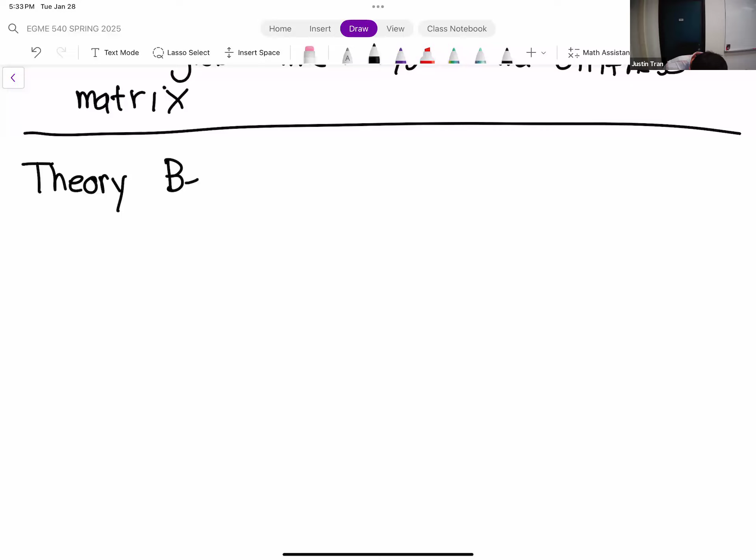So the topic for today, I call it the theory behind FEA. Like I mentioned, this class is pretty much almost entirely application driven, and we'll be learning about ANSYS for the entire semester, but it's still useful, especially if you've never seen finite elements before, to at least understand what's going on at a very broad level, so that you know what the computer is doing.

So like I mentioned, finite element analysis, or FEA for short, actually doesn't have anything to do with computers at all. Nowadays, we often associate it together with computers because of softwares like ANSYS and softwares like Abaqus or SolidWorks simulation. But in the very early days, finite element analysis started as just a subject or topic of research in applied mathematics.

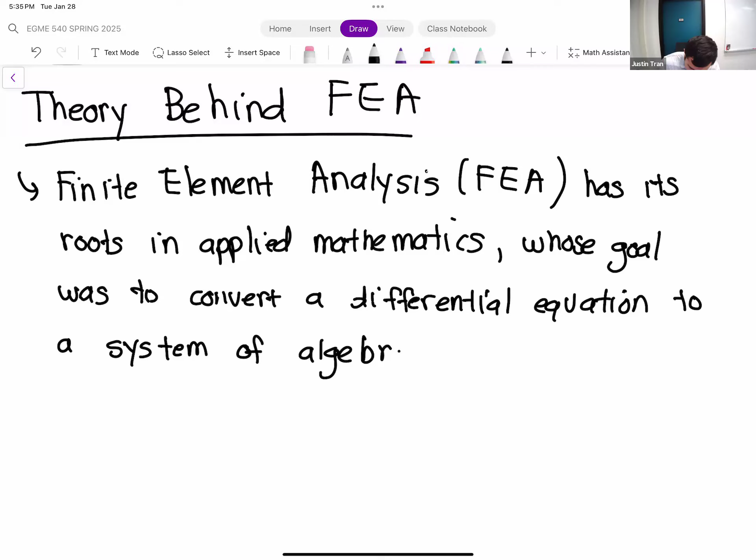And so FEA on by itself actually didn't find the solution to a problem. It just took your problem and transformed it into another problem. So, kind of symbolically, it kind of looks something like this.

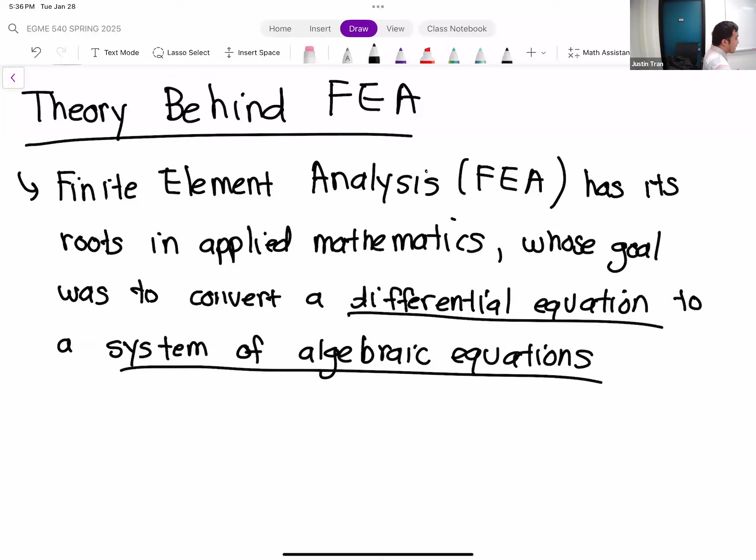So you would take a differential equation, any differential equation. I'm going to use the heat equation as an example here. So let's say we take the heat equation. It doesn't have to be the heat equation, that's just usually the first differential equation that comes to mind.

So here we have a differential equation, in this case, a partial differential equation. If you've already taken 438 or 538, that hopefully should be familiar to you.

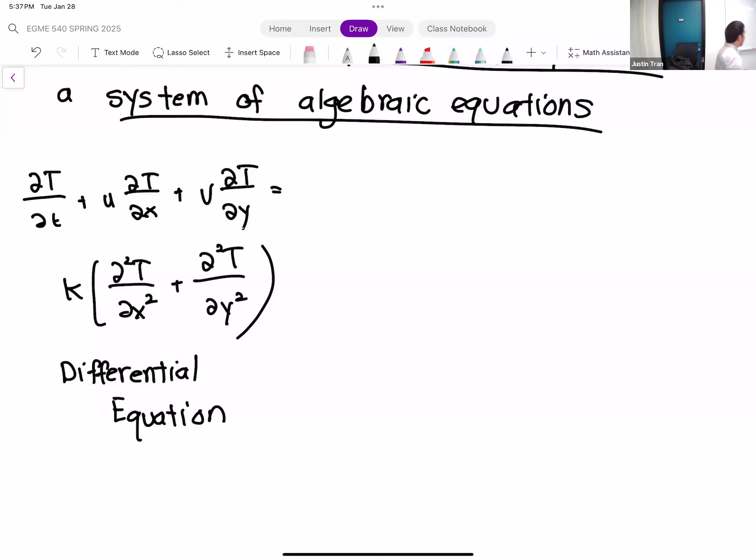And then through finite element analysis, FEA kind of forms this bridge in the middle. So FEA is not the solution itself, it's just a way of transforming the problem.

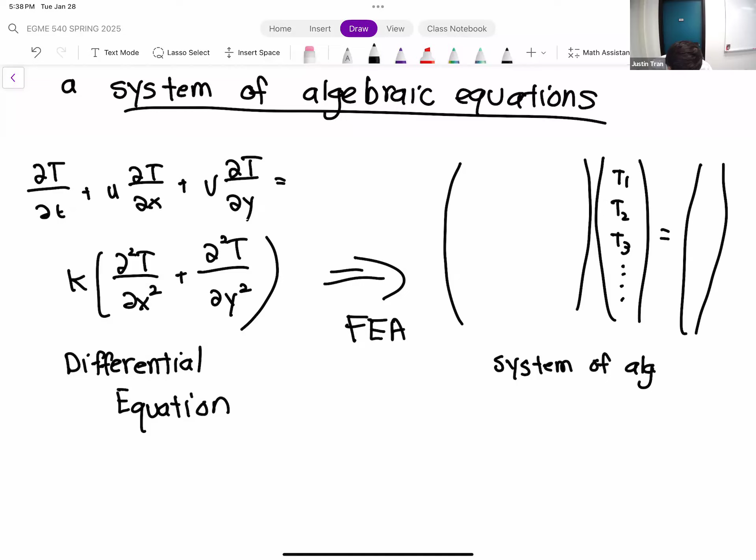And so through FEA, you can take this differential equation and get a corresponding system of algebraic equations. On the right here, you can see I've displayed the algebraic equations in matrix form, right?

Anytime you have a system of algebraic equations that are linear and constant coefficient, you can transform it into a matrix. And that's often convenient if you have, usually if you have more than 5 or 6 equations, it's more convenient to display it in matrix form. And so that's something you're going to see throughout today as well, you're going to see multiple matrices.

And the reason I use matrices here is actually very important for FEA as well, because this is not usually a small system of equations. So this is not 5 equations, 5 unknowns, not even 10 equations, 10 unknowns. We're talking about thousands of equations, thousands of unknowns, or even millions of equations, millions of unknowns. So this matrix here can have anywhere between 10,000 to 1 million equations, just as a starting point.

Right, so these are not trivial systems. And so the idea is that, after you transform the equation with FEA, you get this algebraic system of equations, you solve this algebraic system of equations, and the solution to that algebraic system of equations is equivalent to the original differential equation, or at least it's very close to it.

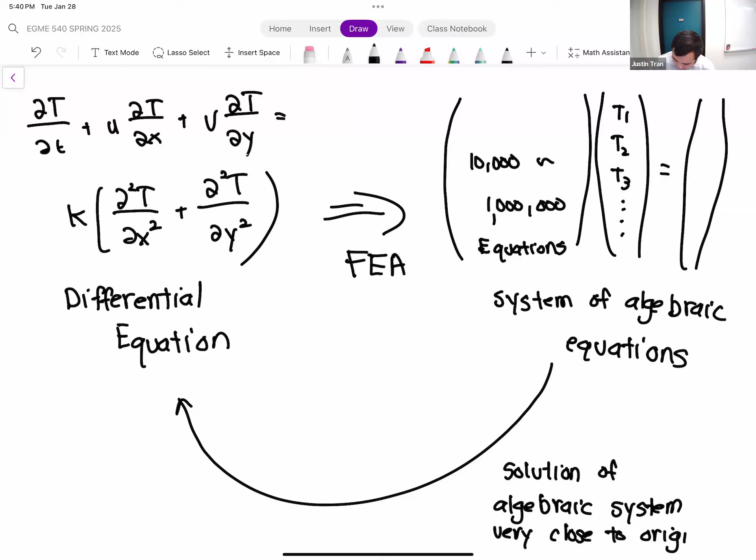Okay, so if you don't want to solve a differential equation, but instead want to solve an algebraic equation, you can use FEA to transform the problem into an algebraic problem, solve the algebra problem, and then you'd have your solution from it.

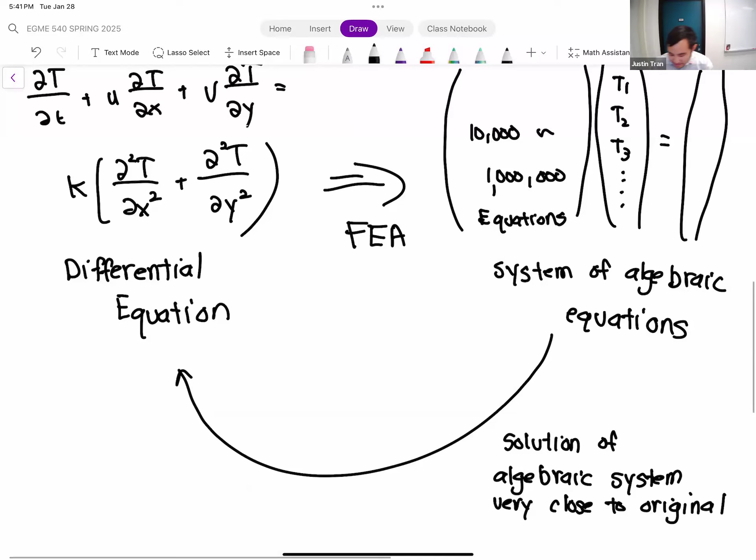So when FEA was first introduced, it was not very well received, because when FEA was first proposed as a theory, this was before the age of computers, before we knew that computers were good at solving these kinds of systems. So people proposed FEA, saying, look, we can take a differential equation and transform it into a system of equations. And the general response was, great, now instead of a really difficult differential equation to solve, we have a really difficult algebra problem to solve. So you've solved nothing, right? And so in its first state, this was not very useful to people.

So this was not useful by itself. It kind of just existed as a novelty, a cool concept, but it didn't really take off as something actually practical.

And it's easy to look at this in hindsight and think those people were fools, how could they not see this was great? Turns out, a lot of ideas in the academic community are just terrible ideas. So this was not an unreasonable reaction by most people at the time.

It wasn't until the 70s, and a lot more in the 80s, that computers and the idea of using computing to solve math problems really started to take off.

Because there's a lot of things computers are good at, but one particular thing computers are actually really good at doing, and it's very relevant today as well, is that computers are really good at solving algebra problems.

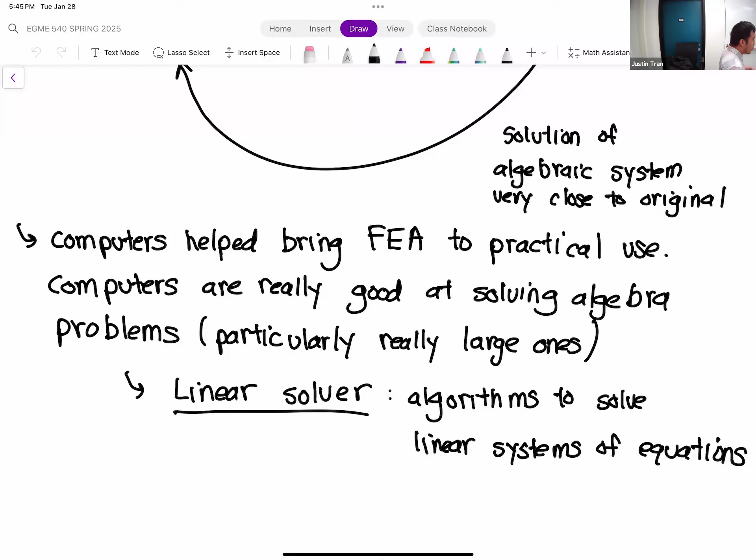But as linear solvers and computers start to show that they can solve these very large systems of equations, people start to say, hey, remember that FEA thing that everyone thought was stupid like 10 years ago? What if we actually start to use that and combine it with computing? And so that's kind of when FEA started to take off.

So computers aren't really that great at solving differential equations by itself, that's not something that can be done at this point. But if you take your differential equation, transform it into an algebraic system, and solve it in a computer, all of a sudden you have a very, very powerful tool.

And it turns out most engineering systems, when you talk about their physical behavior, whether you're talking about a structural system, a thermal system, a fluid system, or an electromagnetic system, the governing laws of conservation of mass, momentum, and energy are pretty much all differential equations.

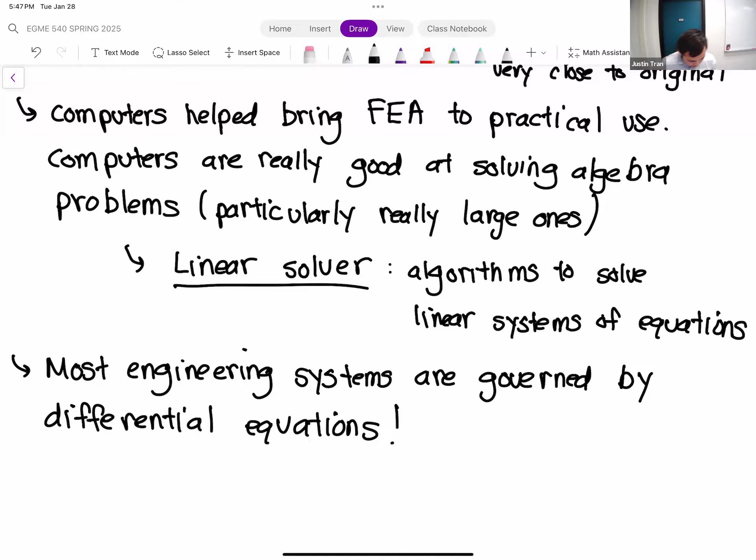So the general flow chart, which is still used today for FEA, goes like the following. Usually when you're doing any kind of analysis or design, you start with some physical engineering system.

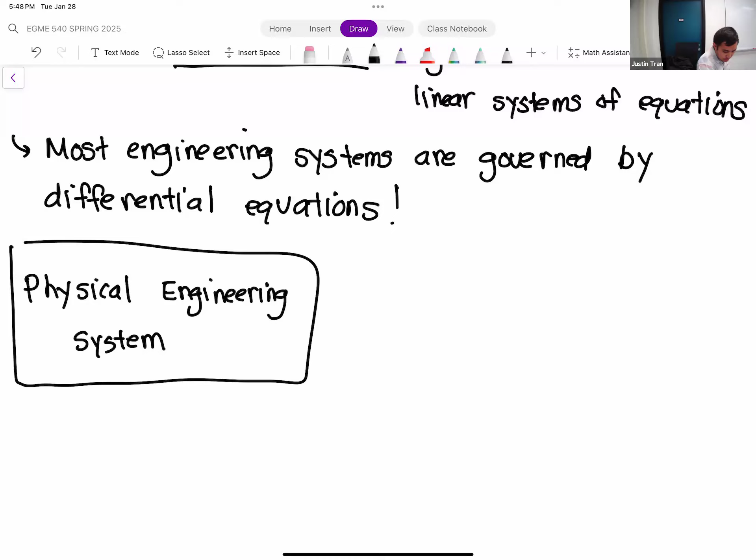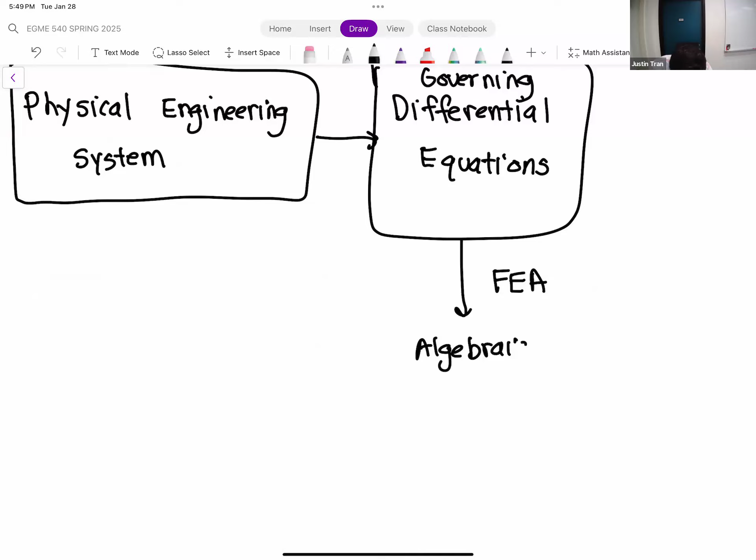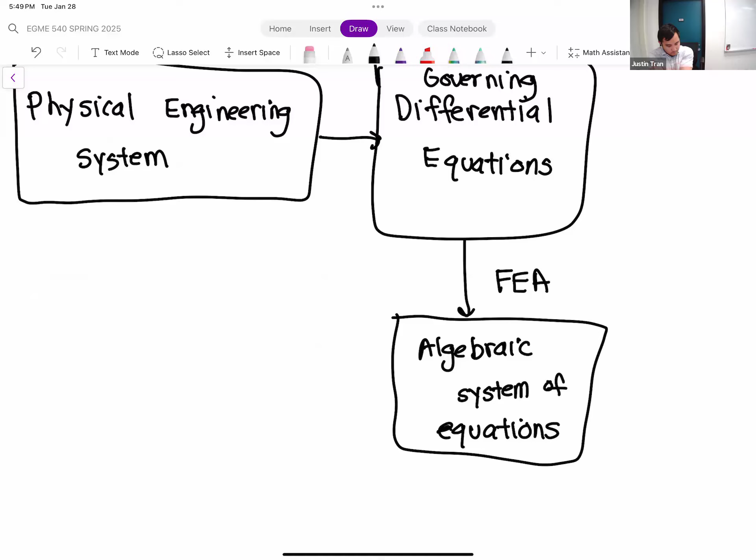And I say physical, but this could also be electromagnetic, thermal, fluids—anything that's governed by differential equations. I just say governing differential equations. What you can do at that point is take those differential equations on your complex system, use FEA to transform it into an algebraic system of equations.

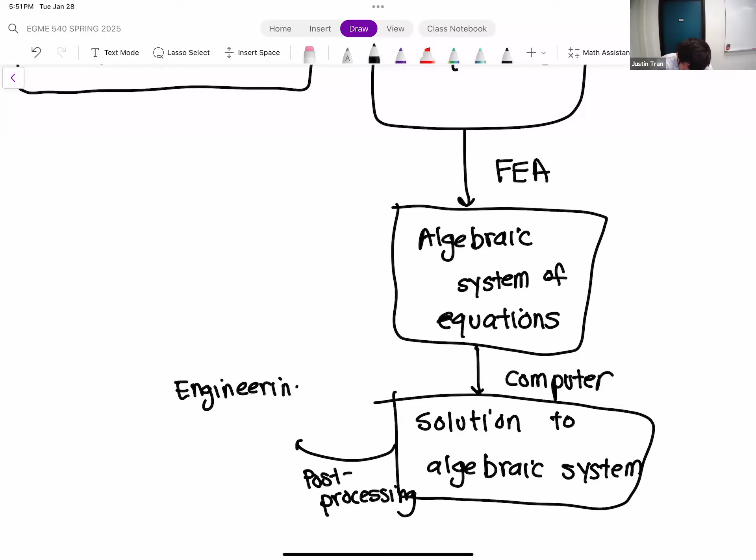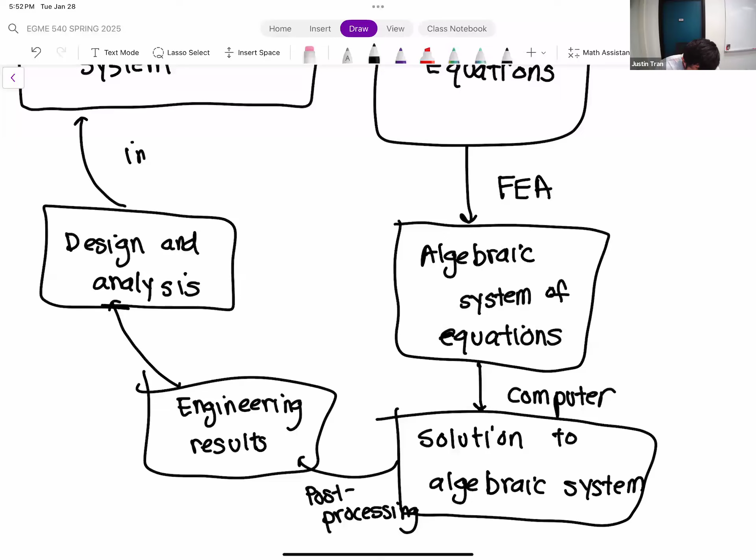And that'll give you the results. Then from those results, you can pass them to an engineer to do any kind of design and analysis. Maybe he wants to tweak the design, or analyze a certain part, compute the stresses. So that's when you start to do the real engineering work. And then based on the design and analysis, you can improve your original engineering system.

So now, with the development of FEA and computing, this new paradigm and new way of doing engineering work that utilizes a computer really started to form. This cycle is, I would say, emblematic of a lot of modern engineering design and analysis that utilizes computers and tools to do this stuff for you. And of course, within this process, you have things like SolidWorks—you'd use SolidWorks to modify your design and get the drawings for it. So it's all within one integrated system that FEA helps facilitate.

Okay. All right, any questions on this?

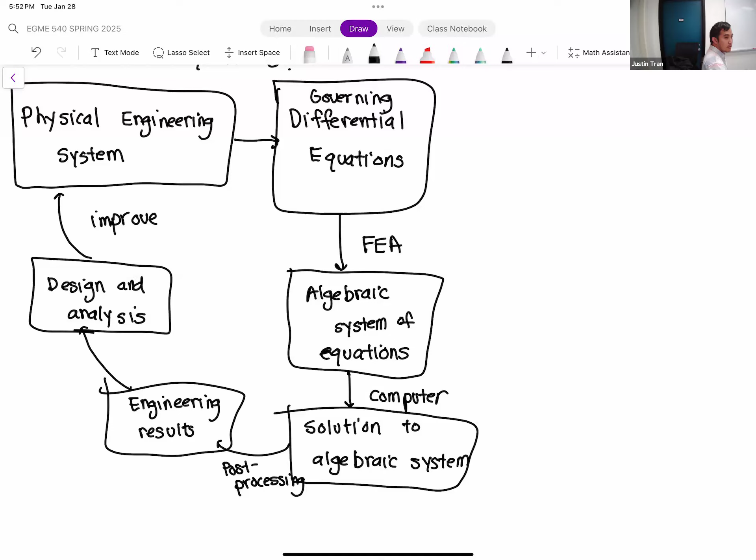Cool. I like telling this story because, even though a lot of times when scientists or researchers come up with a new idea, it seems really stupid at first, a lot of times the technology just may not be there to utilize it effectively. And I think you're seeing that with a lot of machine learning and AI stuff as well. Machine learning has been around for a long time—I remember people talking about it basically all through when I was in school. But it's only now that we have these really powerful NVIDIA chips that it's really becoming part of our everyday life.

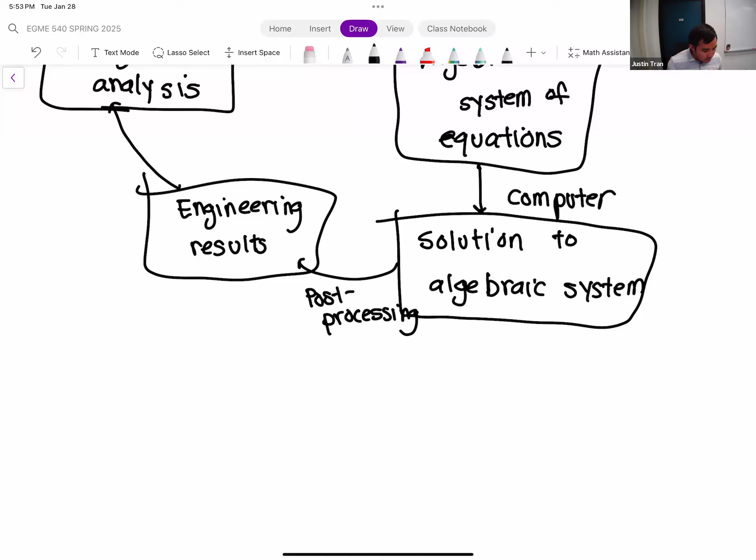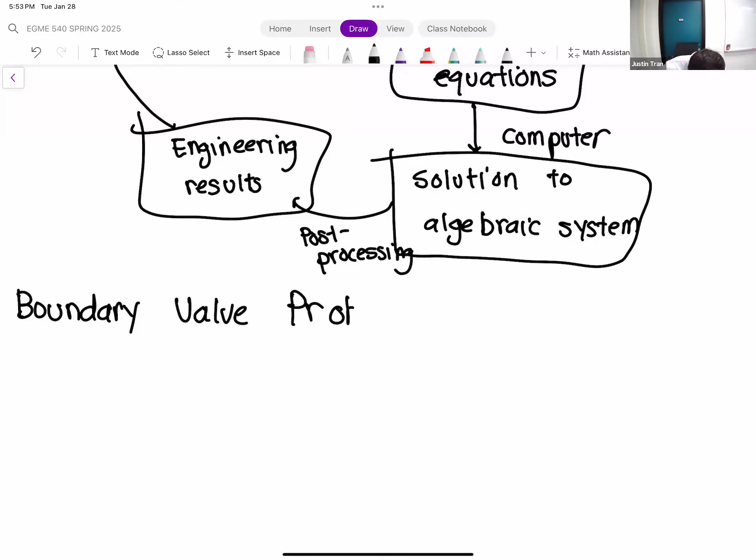Okay, so let's move on. All right, the next thing I want to talk about is the concept of a boundary value problem. A boundary value problem is basically an expression of the underlying mathematical problem that FEA hopes to solve, or strives to solve.

So at the heart of every finite element analysis, even the activity we did last Thursday, is an underlying boundary value problem. I'm bringing this up because whenever you do a new FEA or finite element analysis, it's always useful to think about what's the underlying boundary value problem. It helps organize your thoughts, helps determine the boundary conditions and what equations to solve. And a lot of times, it's actually very useful to write it down as well.

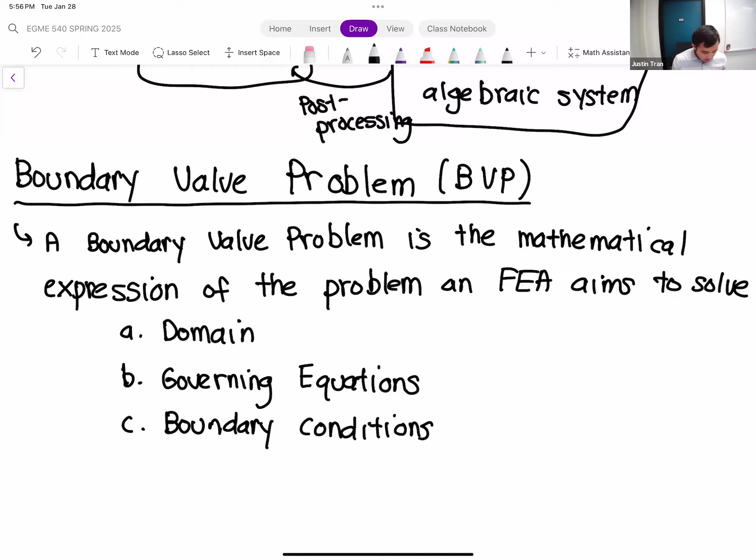Okay, so there are three parts to a boundary value problem. Part one is the domain. Part two is the governing equations. And part three are the boundary conditions. We're going to go through each of these parts. All right, so let's talk about the domain first.

So the domain of a finite element analysis is simply just the geometry on which we want to solve the equation, or the geometry that we want to perform the analysis.

It defines things very simply, like it defines the volume of the analysis, and defines the surface area. It also gives all the surfaces and all of the places where we can apply things like boundary conditions and things like that. Okay. It's the starting point.

So before you start an FEA analysis, you need to have some kind of geometry or some kind of domain, which, again, seems obvious. But it also brings up some very interesting questions of what should be part of your domain to begin with. Okay, so the domain for practical FEAs is often defined by the CAD file that you're using for the analysis.

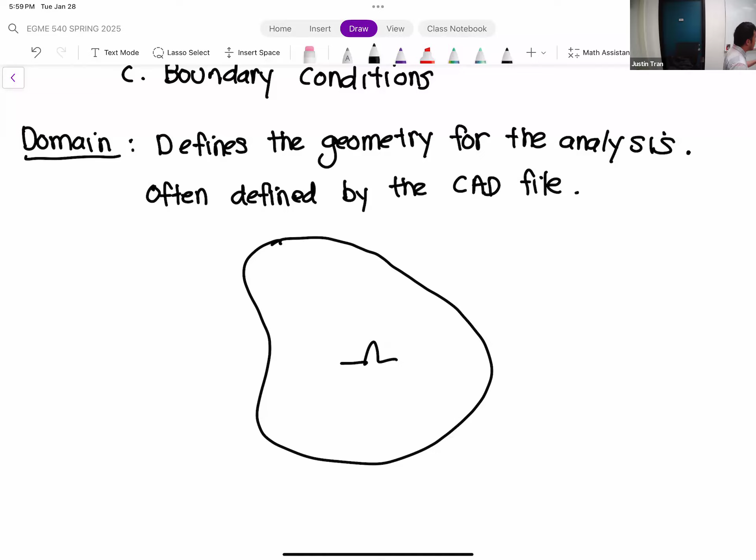Okay. And so I've drawn the potato here for a good reason, because oftentimes we differentiate between two areas of our domain. We have the interior of the domain. The interior domain I often give the symbol omega. And then we have the exterior of the domain as well. The exterior of the domain is often given the symbol partial omega.

So we often differentiate between those two, and oftentimes we make that differentiation just because the exterior is often where we apply boundary conditions. Okay. We'll talk about this in the coming weeks as well, but for the exterior, you often need to use a different meshing scheme.

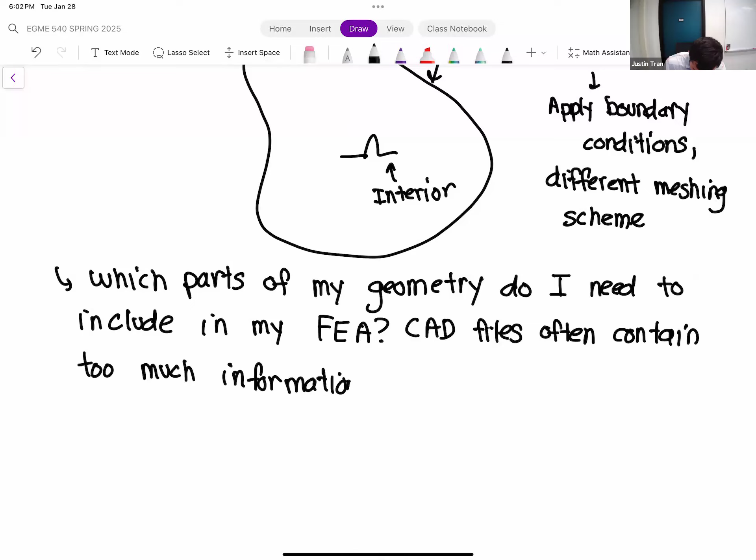So a lot of times, let's say you're an FEA engineer working for a company, and you get a CAD file passed to you from the design engineer. Oftentimes that CAD file is going to have way more information than you need to actually run your analysis. Okay, what do I mean by that? One thing that you're always going to be fighting with in FEA is this idea of how many mesh elements do I need, right? The more mesh elements you have, the more expensive your simulation is going to be.

Usually when you produce a CAD file that's going to be used for design, you're going to include every aspect of that design possible, right? And that includes all the really tiny details or all the superficial stuff, because you're designing something to be made. When you run an FEA, a lot of times you're running stress analysis on parts that are going to be bearing weight or bearing load.

A lot of times, all those really small features on the exterior of your CAD file or your geometry are not really going to be important in the analysis. But they're still going to take up a lot of cost. It takes a lot of energy, a lot of computing power to mesh it and to solve it, right?

And so one thing we're going to talk about a lot in this class is what are the best ways to take a geometry and strip it to the most important parts and then run your analysis on that. A lot of times, just by doing that simple step, you're going to save yourself a lot of cost, a lot of time, a lot of energy, rather than trying to simulate every little thing. Okay.

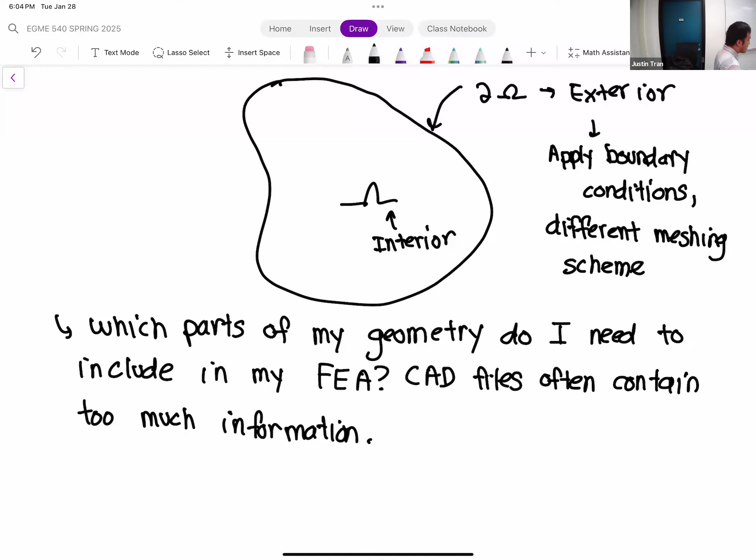Okay, second part to a boundary value problem is the governing equations. Okay. So the governing equations, in a nutshell, these are the differential equations that govern the physical behavior of your system. So every physical system has its own governing equations, okay? Whether it be a structural system, thermal system, fluid system, electromagnetic system, there's some differential equations that govern the system, okay?

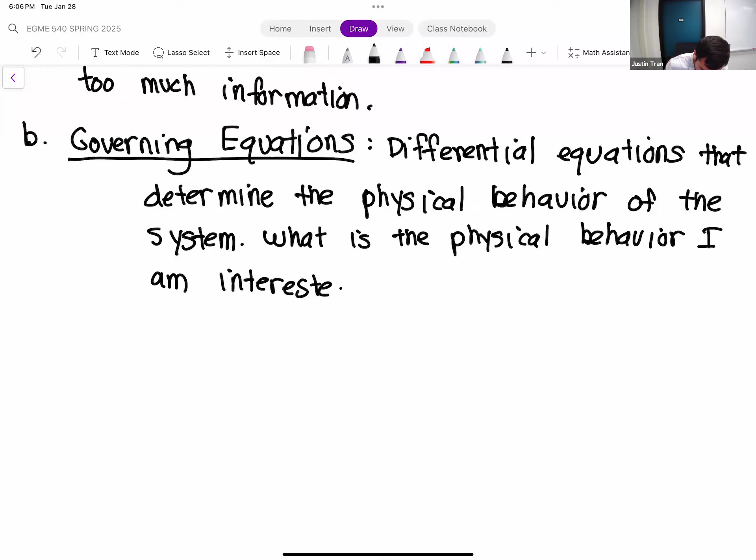So it's always useful to think about, what is the most important physical behavior that I'm interested in solving for in this problem, which, again, seems like kind of an obvious question. And in a lot of cases, it is fairly obvious what you're going to be interested in, okay? But a lot of really interesting engineering problems often involve multiple equations, okay? And those equations aren't really added in by default. You have to manually add those equations yourself.

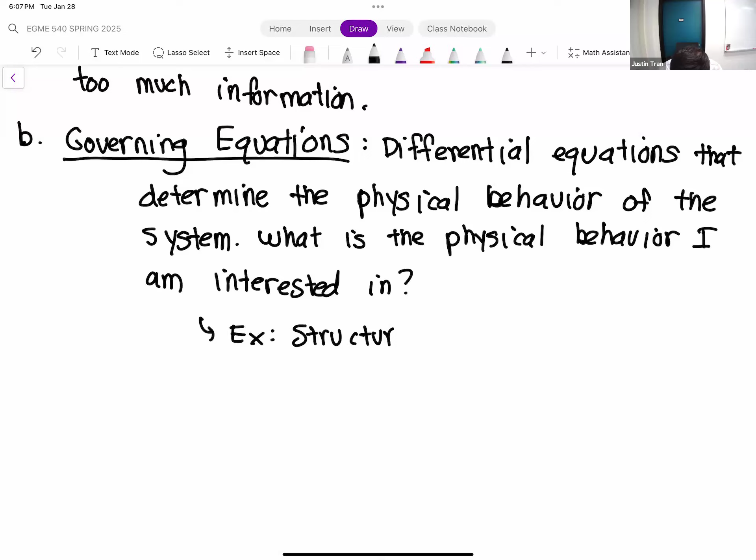So for example, I'll give you one of my favorite examples to give in this case. Oftentimes, a structural simulation will be paired with a thermal simulation. Okay. So if you have a situation where you have a part that's being exposed to some kind of physical loads, forces, pressures, but there may be some heating element involved as well. So maybe the part's being heated as it's going through its thing, or maybe it's being cooled, right? And so one thing that's well known, especially for metals, is that if you heat up a metal or cool down a metal, the temperature of the metal itself will determine its stiffness, its strength, its material properties, right?

That's kind of how blacksmithing works in general, right? In order to make a metal malleable and easy to shape, you can heat it up to extreme temperatures, then you can shape it much easier than a cold piece, right? And so if you have an application where heat transfer is going to be a big thing, but also structures, you need to couple these two types of analysis. And it's not automatic either.

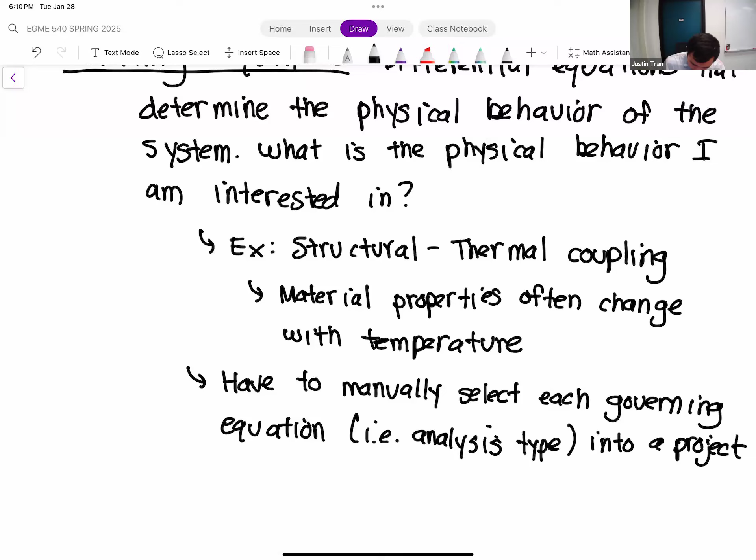Yeah, I think in ANSYS they're called analysis types or analysis systems. Actually, let me list a few here just for completeness' sake. Okay. So the one we'll probably use most commonly in this class is what's called static structural. So static structural is a structural type of analysis that's static, and that essentially means that it's not changing with time. Okay.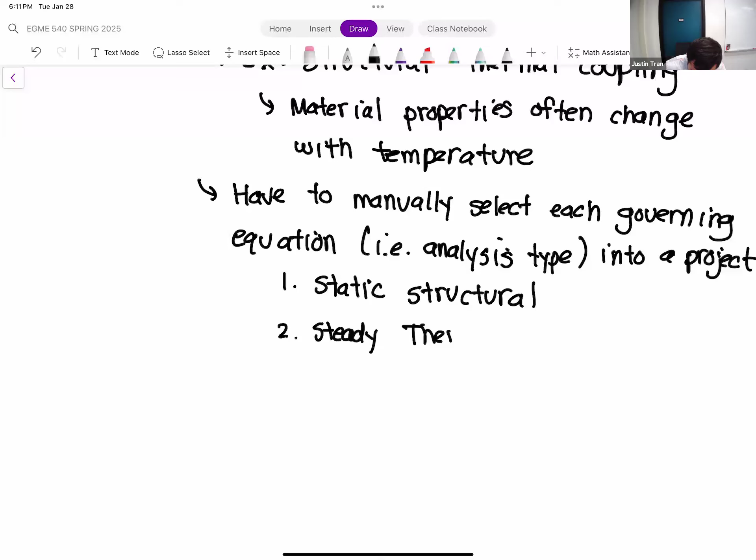Another common one that's used is what's called steady thermal or steady state thermal. So again, this is a thermal situation which is not changing with time, hence the name, okay? But the thermal means that you're going to be solving the heat equation, okay?

Another one that you can do in ANSYS is fluid flow. Fluid flow is actually interesting because it uses a different software called Fluent in ANSYS as well. I do have a handout on it, although I'm not super familiar with Fluent. I often use another tool for CFD, but it is possible to do fluid flow within ANSYS. Okay.

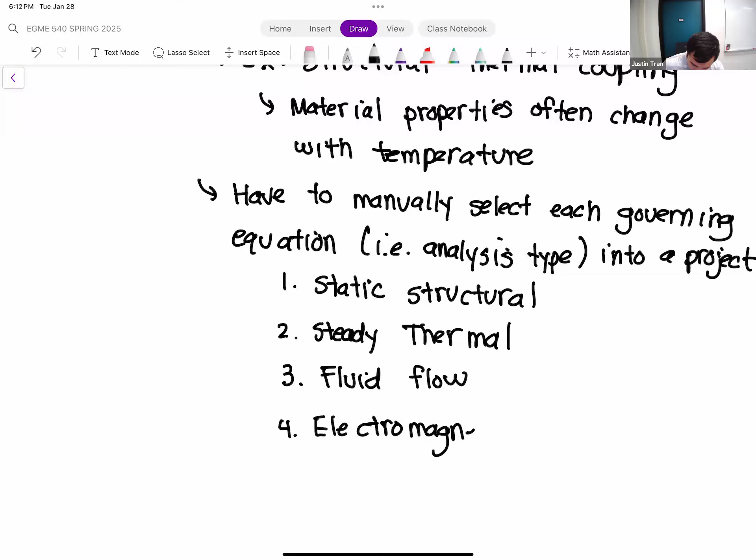And like I mentioned, there is electromagnetism. That is possible within ANSYS as well. I will say that I've never tried it in ANSYS before, just because I'm not an electrical engineer. But the capability does exist to do that type of analysis. Okay.

And also ANSYS has the ability to do time varying analysis as well. So not just steady, not just static analysis, but things that actually change with time. And so there's transient structural, there's transient thermal, there's transient, well, fluid flow is always transient, but you can do transient electromagnetism as well.

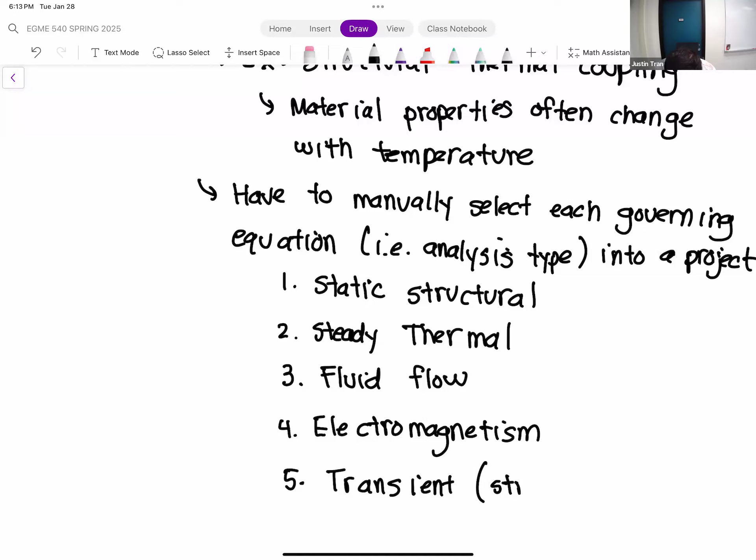Okay. So technically, there's a separate transient one for each of these. So number 5 should be transient structural, number 6 should be transient thermal, number 7 transient fluid, and then transient electromagnetic. So there's transient versions for all of them.

So next time you open up ANSYS, if you're not done with the first activity, you could see on the left there's probably about, I would say, maybe 30 different analysis systems there. So there's a lot within ANSYS itself. And so choosing the right analysis system, choosing the right governing equations, especially when you have multiple types of physics going on, is something that's really important. Okay.

All right. Any questions on governing equations? Yes. You mentioned that you don't use Fluent. Is the program you use better suited for your application? Solver different? Right. So my research personally is on blood flow. So I use basically an open source software called SimVascular to do this. People have used Fluent for blood flow, but I'm just more familiar with SimVascular, so I've used it.

Okay. All right, so let's get to the last aspect of a boundary value problem, which is what actually gives the boundary value problem its name, which are the boundary conditions. So boundary conditions, like I alluded to back when we were talking about the domain, are only really applied on the extremity or the exterior of the domain. In particular, boundary conditions basically describe how the exterior parts of our domain are going to behave from a solution point of view.

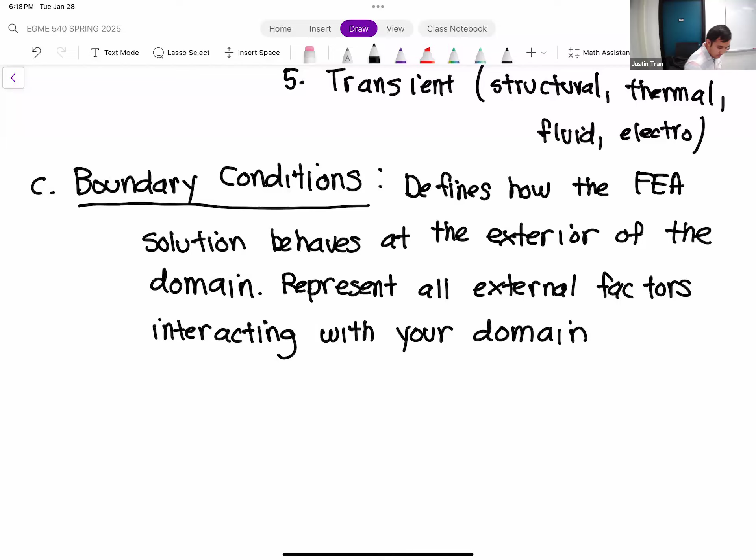And so boundary conditions, alongside meshing, are something we're going to be talking about a lot in this class, just because boundary conditions are probably one of the most important things that determine the accuracy of your simulation. Okay.

And for me, I generally separate the boundary conditions into two main types. The first type of boundary condition that I like to describe is what's called constraint type boundary conditions. And the other type of boundary condition are load type boundary conditions. Okay. And both of those have different conceptual and different mathematical ways that they're applied as well. Okay.

So one thing that I want to highlight here is the interaction between the boundary conditions and the governing equation, at least from a conceptual point. Okay. And so conceptually, you can think of the boundary conditions as the inputs to our boundary value problem. And I'll explain what that means in a second.

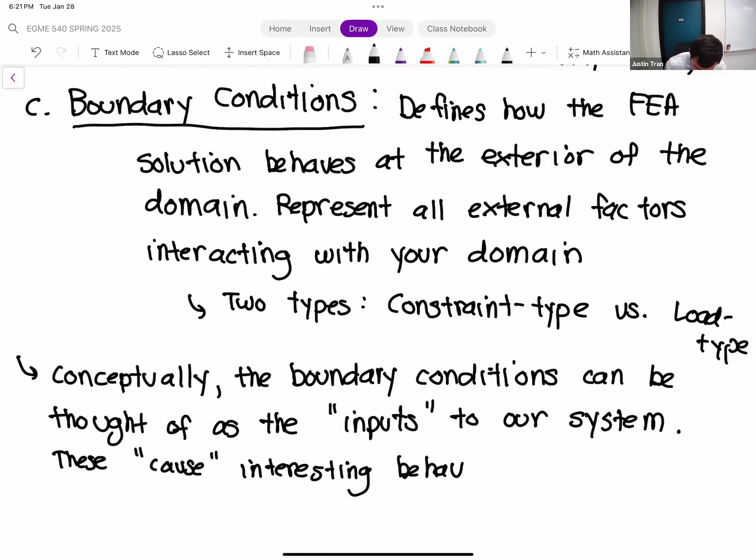Because without boundary conditions, every physical system is actually very boring. It actually doesn't do anything. Okay. Let me give you an example. So that book right there sitting on that table right now has no boundary conditions being applied to it, other than the fact that it's being held up from gravity. So the only force being applied is gravity, and there's a normal force that opposes it, and so that's why it's just sitting by itself, right? By itself, it's very boring.

Now, if I were to go up to that book and just karate chop it with all my might, probably nothing will happen because I'm very weak. But say a very strong person went up and karate chopped that book, that's going to cause some interesting things to happen, right? That karate chop is some kind of external effect or the boundary conditions, okay?

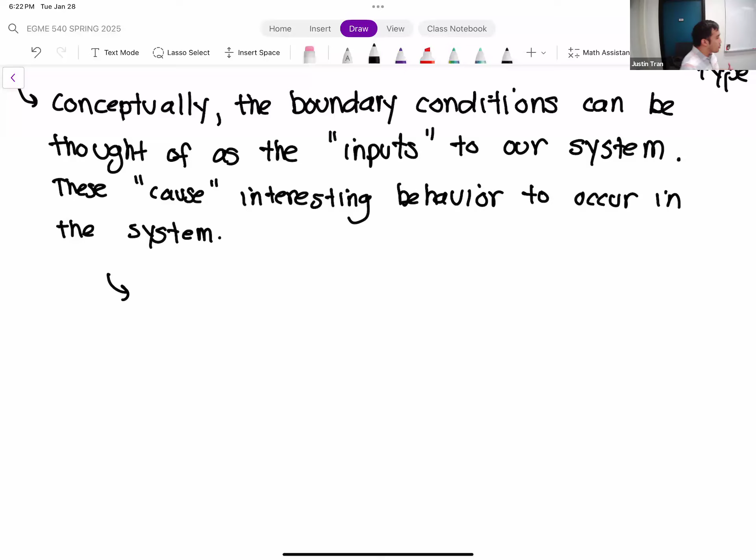So a lot of times, from a finite element mathematical point of view, the boundary conditions are thought of as the input, because without the boundary condition, things are actually quite boring, nothing much really. Okay. So when you apply boundary conditions to a system, the system is oftentimes going to respond in some way. Now, how the system responds is often governed by the governing equations.

Okay. And so you have boundary conditions, think of those as the instigators, the things that are causing some behavior, and the governing equations will determine how your system will respond. Part of the governing equations, of course, are going to be things like the material properties. The material properties modify your governing equations, or they change the magnitude of certain terms.

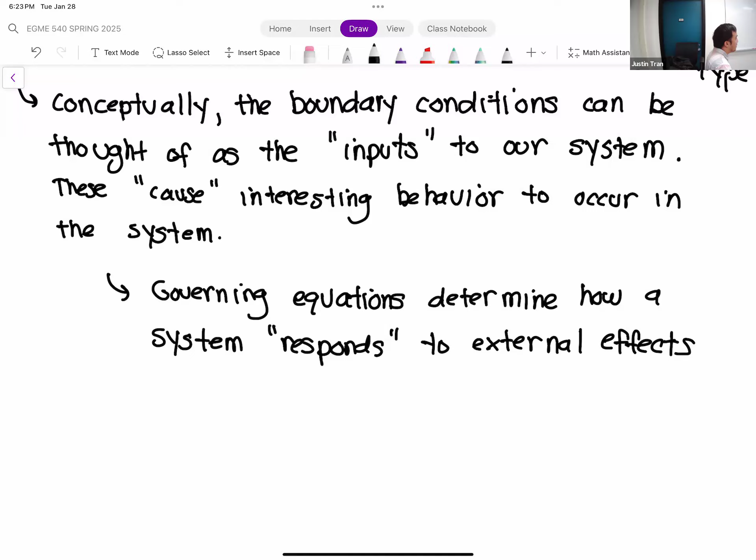But if you think about your FEA, or your boundary value problems, as this cause and effect, or cause and response relationship between the boundary conditions and the governing equations and all that's happening within your domain, it helps to frame a lot of the things that we're doing. Okay. Any questions on boundary conditions?

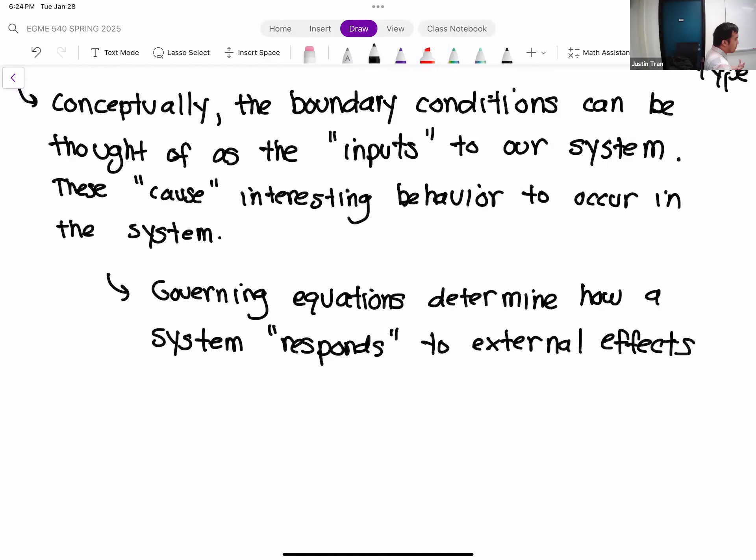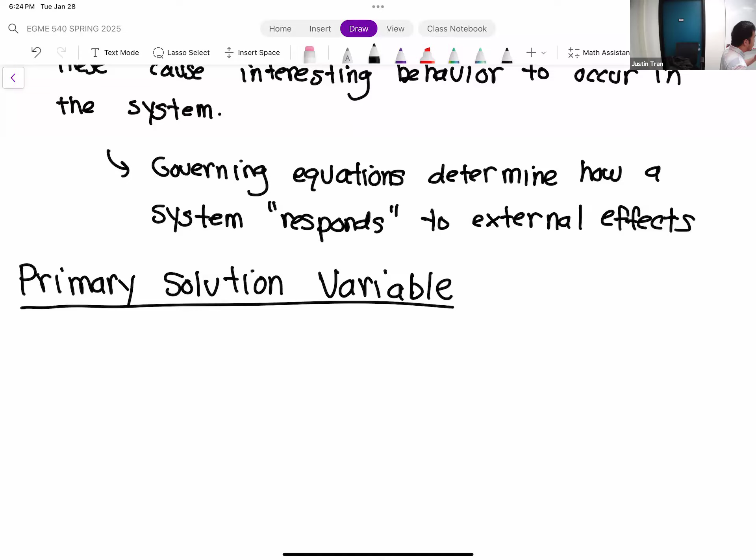Okay. All right. So the next thing I want to talk about is this idea of a primary solution variable. So, like we've talked about today, an FEA is nothing more than a differential equation that we're solving in a computer, right? It transforms into an algebraic equation and so on and so forth. When you solve a differential equation, there's usually one quantity that you solve for first, right?

And so the primary solution variable is whatever quantity or solution is solved for first in a boundary value problem, or the governing differential equations.

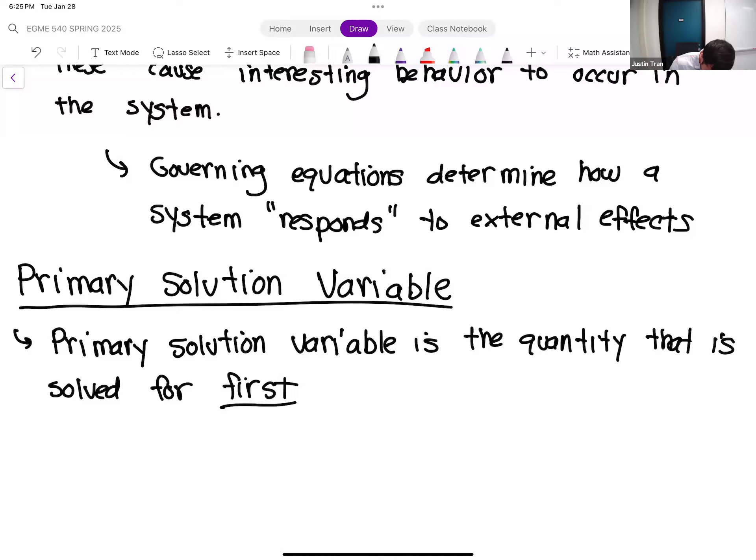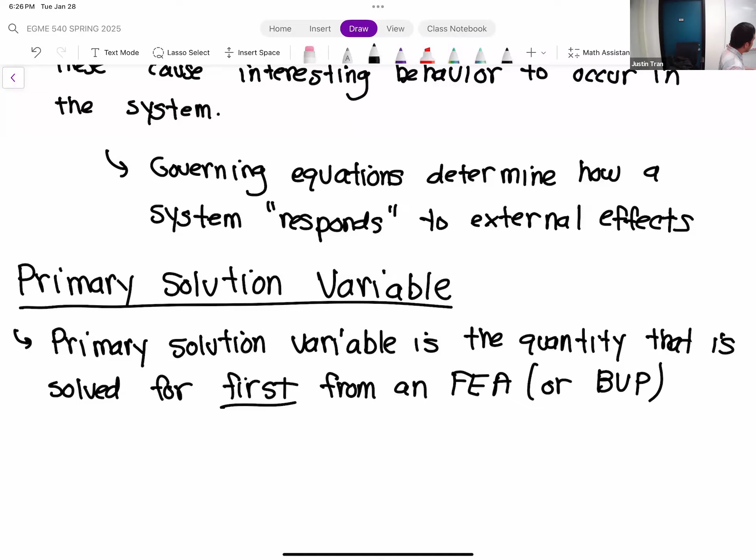Okay. There's always something that's solved for first. And I think this gets lost in the wash a little bit when you're using a tool like ANSYS, and it shows you all the results at once. But under the hood, or mathematically, there's always something that has to be solved for first. And then usually a lot of other quantities are solved for after that. So let me give you an example. In static structural, right?

There are lots of different outputs, or lots of different results that you can show from your FEA simulation, right? You can show things like the total deformation. You can show things like the equivalent stress. And I'll throw one more on there as well. You can also show the equivalent strain.

And even within some of these types of results, there are a lot of subcategories as well. So you can show principal stress, and I know some of you probably did that for activity one. Principal strain, you can show deformation in different directions. You can show stress in different directions, right? You can show factor of safety, things like that.

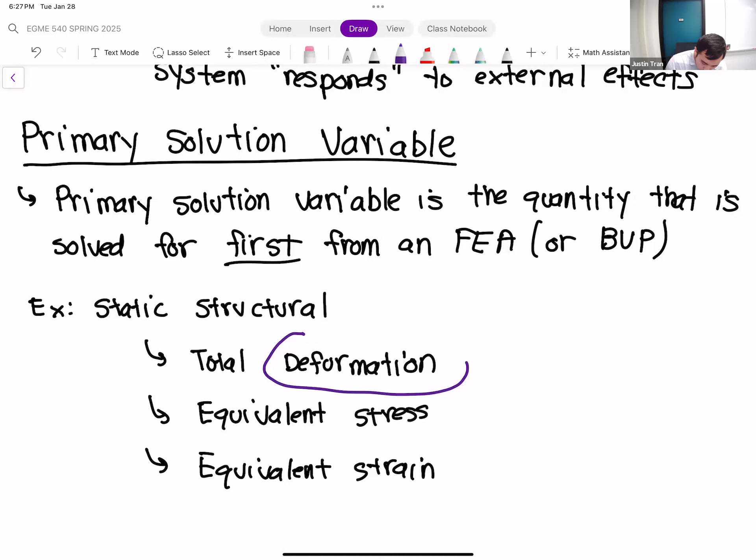So before all of these quantities, there's something that's actually solved for first, which is the primary solution variable. So the primary solution variable in structural simulations is the deformation.

And so whenever you're running a type of governing equation, it's always useful to think about, what is your primary solution variable, right? If you're running a thermal simulation, the primary solution variable there is temperature. If you're running a fluid flow simulation, the primary solution variable is velocity. For electromagnetism, I actually don't even know. I think for electromagnetism, it might be the electric field. I'm guessing everything is derived from there. Okay.

All right, and then all the other results that you see, and sometimes it could be a lot, sometimes it could be a couple dozen, which is the case for structural. Okay, everything else is what's known as a derived quantity. And so a derived quantity is not solved directly from the governing equation. It's not solved directly from the FEA. A derived quantity is computed after you compute the primary solution variable.

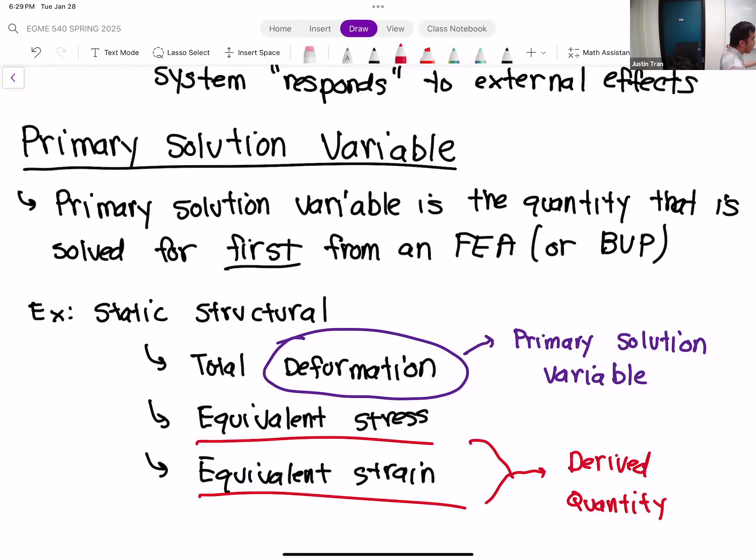And so kind of the order of operations is that first your ANSYS or your FEA is going to solve for the primary solution variable, and then it's going to take that solution and then solve for all of the derived quantities after that. Okay? So other common ones, factor of safety. Factor of safety also is a derived quantity. Okay.

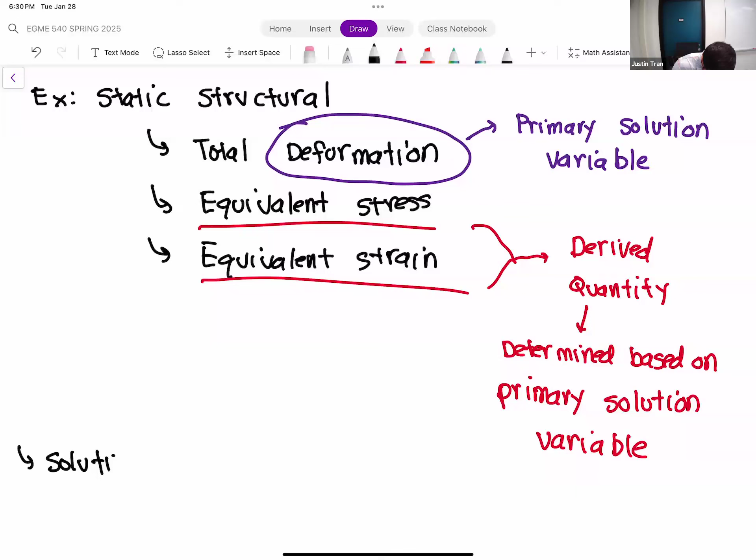So why is this relevant? So generally speaking, your primary solution variable will be computed fairly accurately, or the accuracy of the primary solution variable will be the highest. Okay. So if you're running a static structural simulation, you can probably trust that the total deformation, at least compared to the other types of results, that's going to be the most reliable. Okay, it may still be wrong, but it's probably the least wrong out of everything.

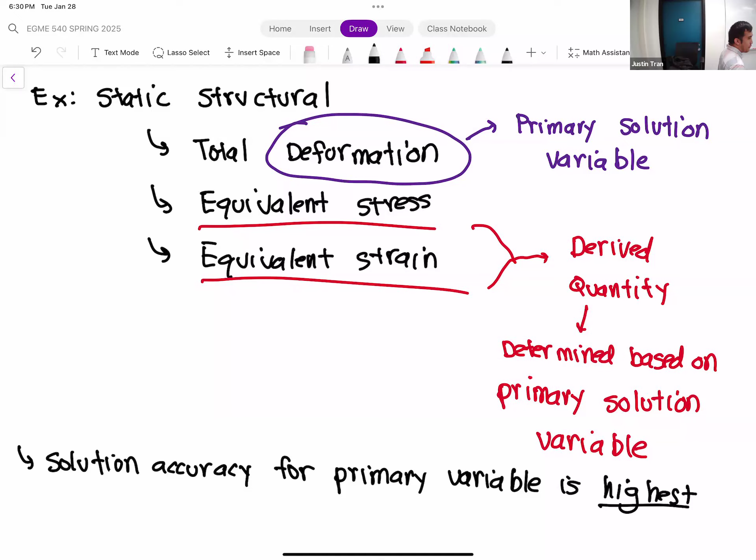And then all your derived quantities, their accuracy or their reliability is going to be low. Okay, so later on in this class, we're going to talk about the concept of a mesh convergence test, which basically tests how accurate or how reliable your solution is relative to the mesh that you have. Okay, and what you should see basically all the time is that your primary solution variable should converge first compared to your derived quantities.

Okay. That's going to be important because you want to ask yourself, what is the primary output, or what's the primary variable that I'm interested in the simulation. And so you don't want to trick yourself and say, I'm interested in the stress, but if I run my convergence test on deformation, I don't want to trick myself into saying that this is more accurate than it is. Okay. So it's always useful to be aware of what your primary solution variable is when you're talking about reliability, accuracy, things. All right. Any questions on this?

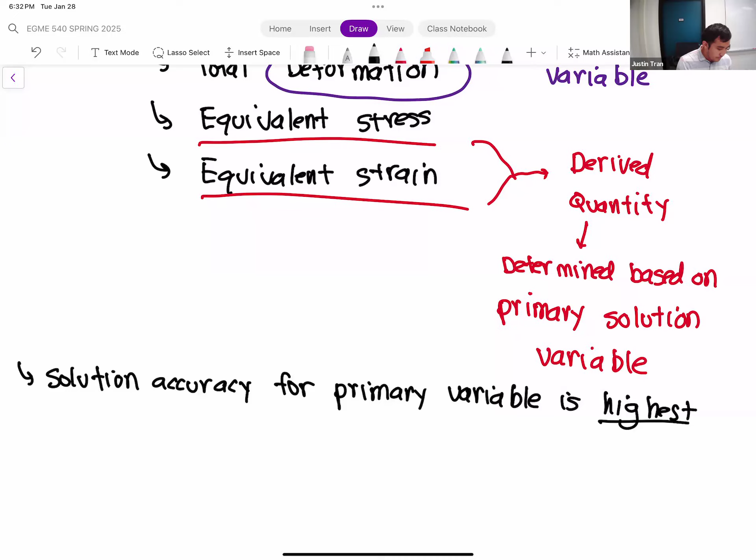Okay, so one last thing before we wrap it up for today is I want to talk about the concept of element stiffness matrices. Now, we're not going to go fully into element stiffness matrices. For those of you who have taken 541 or 410 with me, this is something that we talk about for weeks. It takes a long time to get used to. But I at least want to show you, because I think understanding what the element stiffness matrices are will give you an appreciation of what's the difference between a mesh with 1,000 elements versus a mesh with 1,000,000 elements.

Okay. So the idea with an element stiffness matrix is that whenever you run a finite element simulation, each element in your mesh kind of represents a mathematical system on its own. So every single element in your mesh will have a system of equations that mathematically describes its behavior. It basically takes your governing equations and applies it on that little tiny element. Okay.

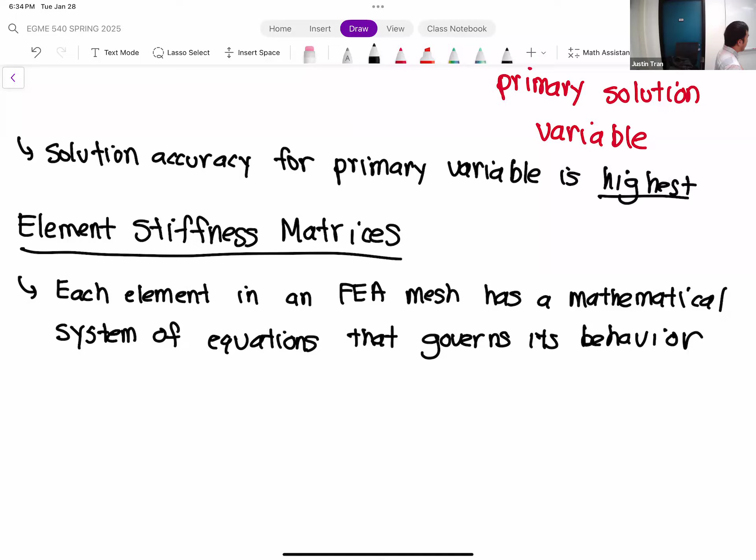So, if you have a mesh, let me go ahead and draw the geometry for our activity 1 again. Okay. And so let's say that you have a mesh that looks like this. Okay.

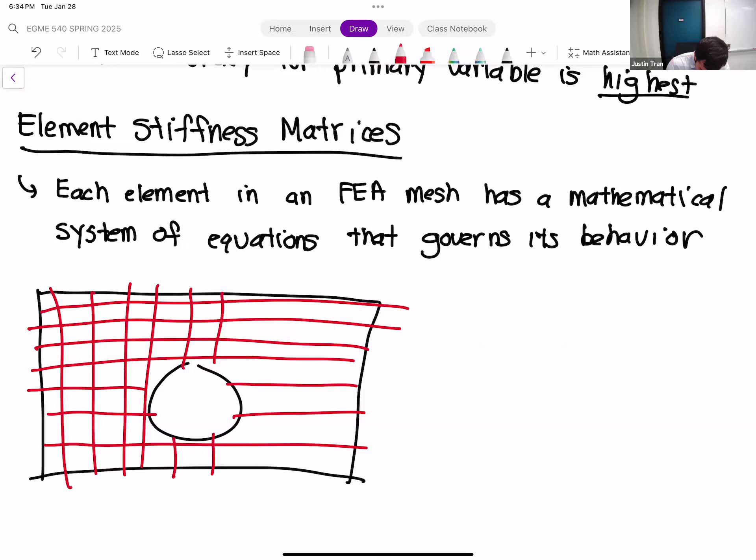Okay, so each element here in this red waffle that I've drawn has a system of equations that governs its behavior. So if I look at this element right here, let me go ahead and bring it out. That small square has its own system of equations that governs its behavior.

Now, if you've taken 541 with me, you may think, oh, that square probably has maybe a 4x4 system of equations that governs its behavior, right? And so that's basically 4 equations and 4 unknowns. So you multiply 4 equations, 4 unknowns by, maybe this mesh has 1,000 elements. So that means there's 4,000 equations and 4,000 unknowns.

Well, the FEA that we did in 541 was kind of a beginner's FEA. So in reality, for something like this in ANSYS, each element probably has somewhere close to maybe 16 to 20 different equations and unknowns associated with it. And then you take that and multiply it by 1,000, 10,000, 50,000 elements that you have, and you can see things start to get out of hand very quickly.

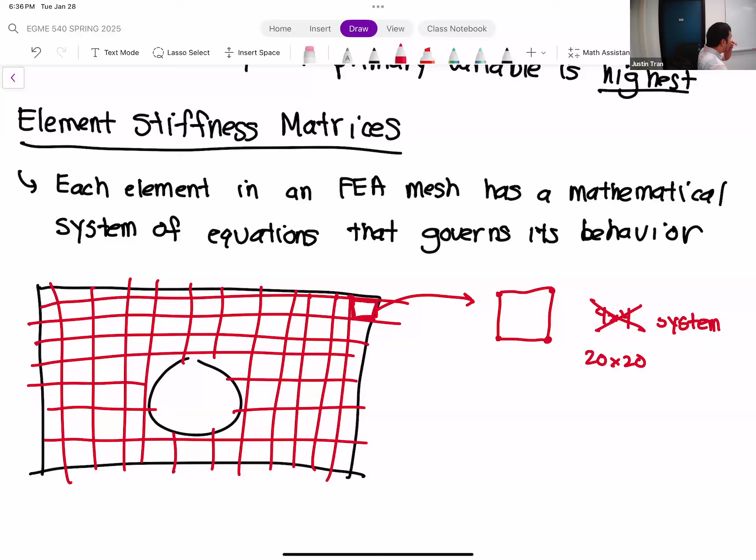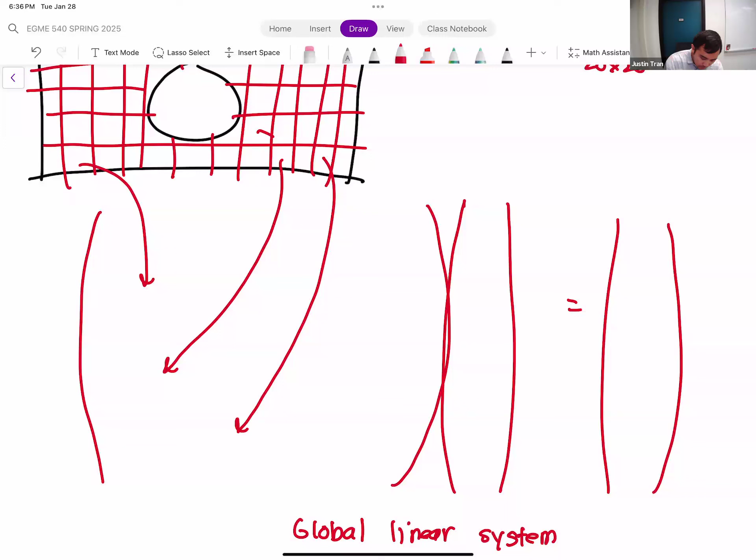Okay, eventually what happens is that for each element here, all of their individual systems are going to get combined into one massive system of equations. So this system of equations is what I call the global linear system. And the global linear system will have contributions from every single element that's in the mesh, okay? So basically, every single element is going to contribute to the global linear system.

And again, in this class, we're not going to go through this, that's 541. If this, for some reason, excites you and makes you want to learn more, then you can take 541 with me. It's probably not a very fun part of the class - you can ask the people who have taken it already. But it becomes a very, very messy procedure, okay?

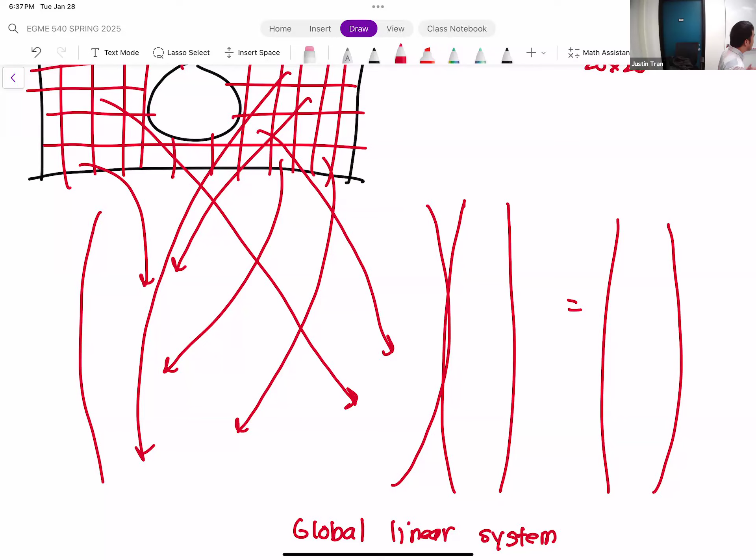And so this is just to kind of illustrate to you that the more elements that you have in the mesh, it really adds a ton of cost to the entire job. So each element that you add to your mesh adds anywhere between 20, 30 equations to the entire system. So it gets pretty out of hand.